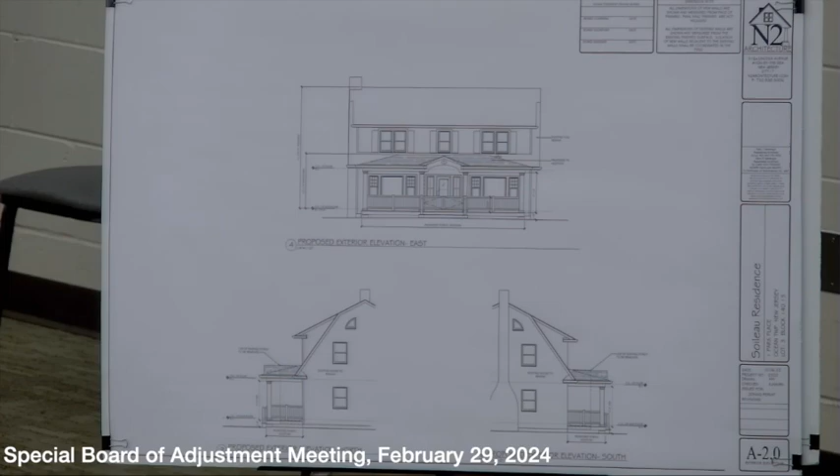This is solely just the porch addition, an open porch addition. We tried our best to integrate it into the house so that it looked like it had always been there. It is a fairly straightforward porch of approximately 7'8" depth and approximately 33'8" wide.

It does not extend all the way to the edges of the building. We knew that we had some issues with the front yard setbacks on the sides, if you will. But also architecturally, it blends in a little better by not going all the way to the edge of the building.

Other than that, it's a fairly standard porch, wood frame structure. It is, as we mentioned, open. It has 36-inch high standard vinyl railing, as seen in the image. It has 4, 10-inch diameter, or square columns, to support it. A hipped roof with asphalt composite shingles, and all the materials will match the standard of the house and neighboring properties.

And that's our application. This is a pretty straightforward application.

And I'll just swear in our professionals, that their testimony they're about to give would be the truth, the whole truth, nothing but the truth, so help them God. I do. Thank you both.

Well, I'll start basically, it's a very difficult site because it's narrow, triangular in shape with 3 frontages, and the variances are just to the sides of the porch, not to the front. They're both within the sides of the house, so this porch doesn't stick out beyond the sides of the house. The master plan actually recommends relaxing the front yard setback standards for covered porches so that properties are more usable. So I don't have any problem at all with this application.

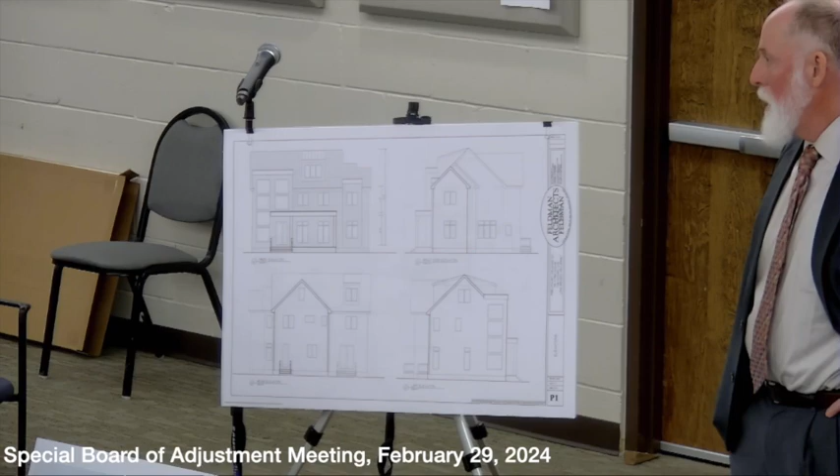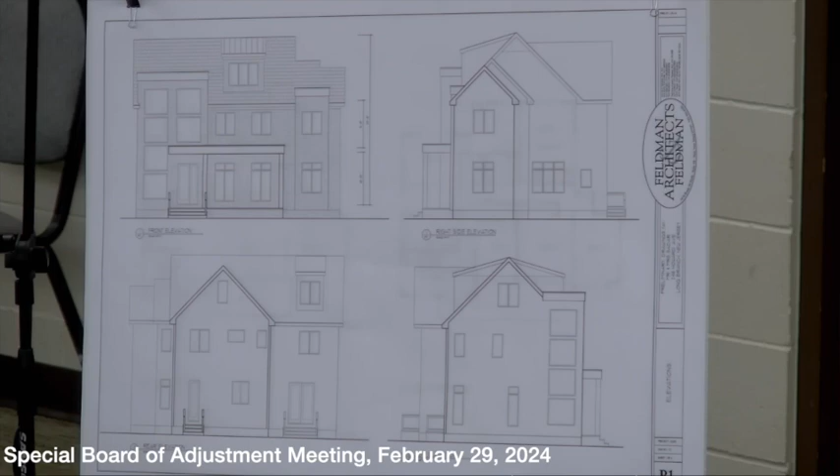So what we're doing is we're expanding an existing two-story home. On the ground floor, we're adding approximately 335 square feet, so it's pretty minimal. Of that, about 175 square feet is living space, and approximately 165 square feet is the exterior porch. The first floor is pretty much going to function the way it functions currently, which is just living space. We enlarged the kitchen area slightly. There's a powder room, a family room, living room, dining area.

And then we created this element, which I'll go into more detail about in a bit, where the staircase would go up to the second floor. The second floor got expanded to 5 bedrooms, 2.5 baths. Currently, I believe there's 3 bedrooms that exist. Their family is growing and they needed additional bedrooms, so they asked if there was a way we could expand that.

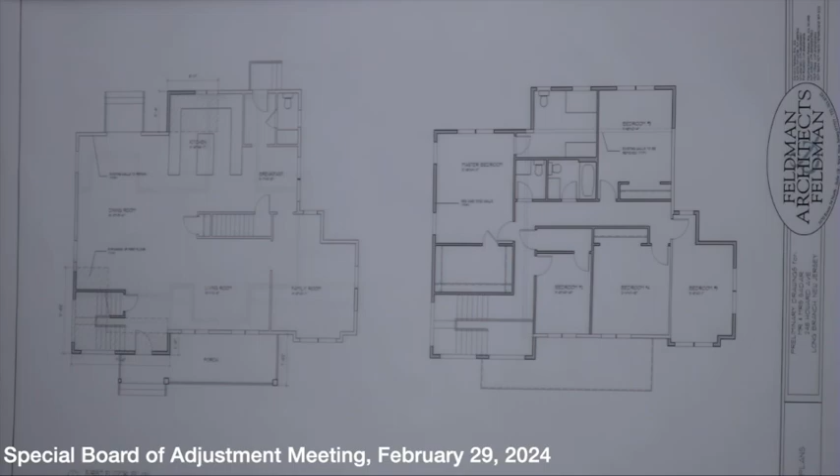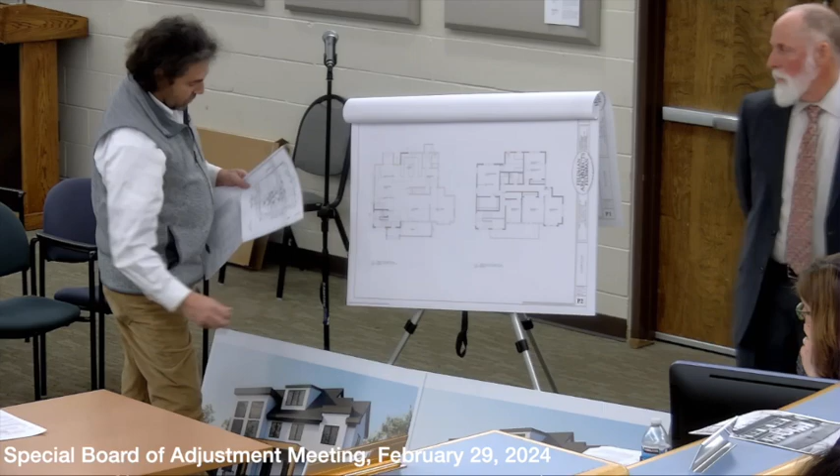As previously mentioned by your board professionals, we are going on the east side, or Wilson Drive. We are going straight up above the existing first floor, which is not increasing the existing nonconformity. The rest of the second floor, other than the addition to the south where the kitchen is getting bumped out, lines up over the existing, except for in the front area here where we're coming out 12 feet towards Howard and approximately 17 feet 4 inches parallel to Howard, which again is going to create the staircase and the entrance coming in.

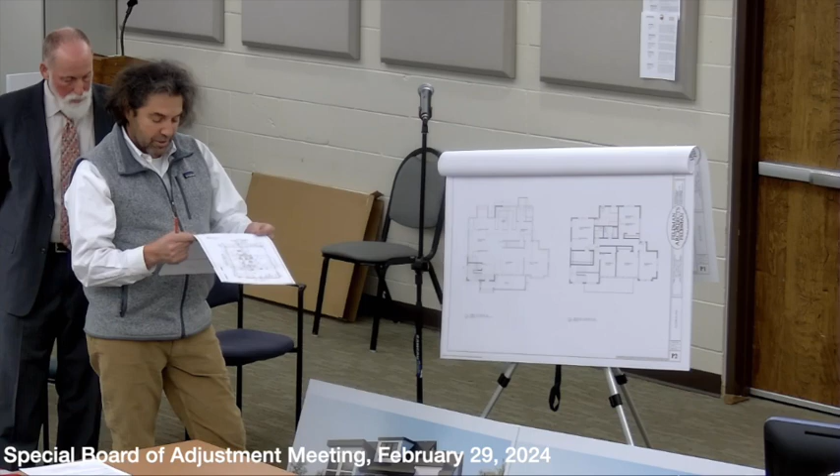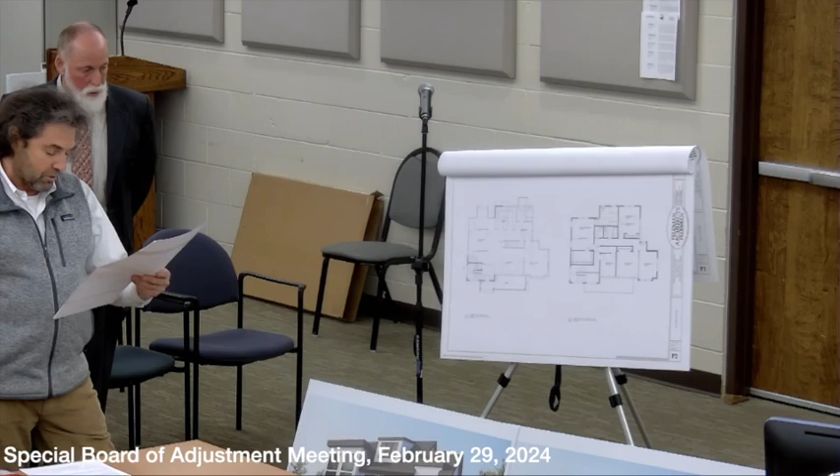Just going through the site itself, the lot area where 10,000 square feet is required, 11,588 is existing. There's no change to that and it conforms. The buildable area, total buildable lot area, is 8,691 square feet, and there's no change to that. The lot width, 90 feet is required, we have 110.6 feet, so that too is conforming, as well as the lot depth where 100 feet is required, and the lot has 100 feet.

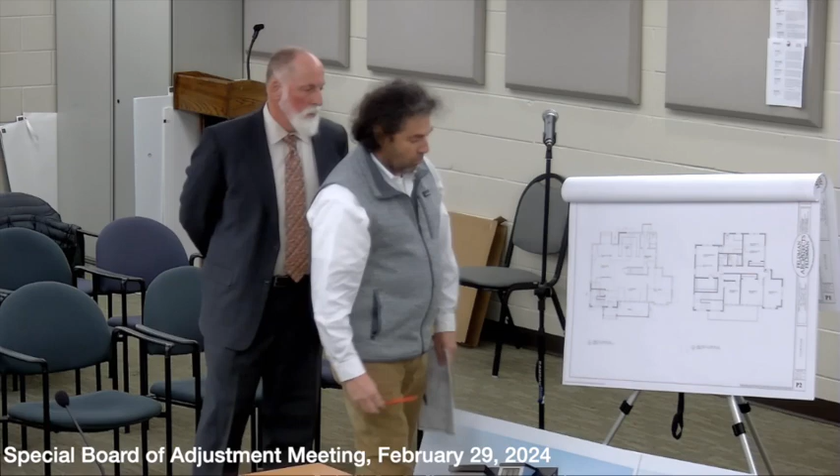The variances that come into play are on Howard Street. Currently, the setback to the front is 29.6 feet to the dwelling. We are now proposing 27 feet to the corner of the stairwell, and we're proposing 22.7 feet to the porch. On Wilson, 13.7 feet is currently existing, and we are maintaining that 13.7 feet.

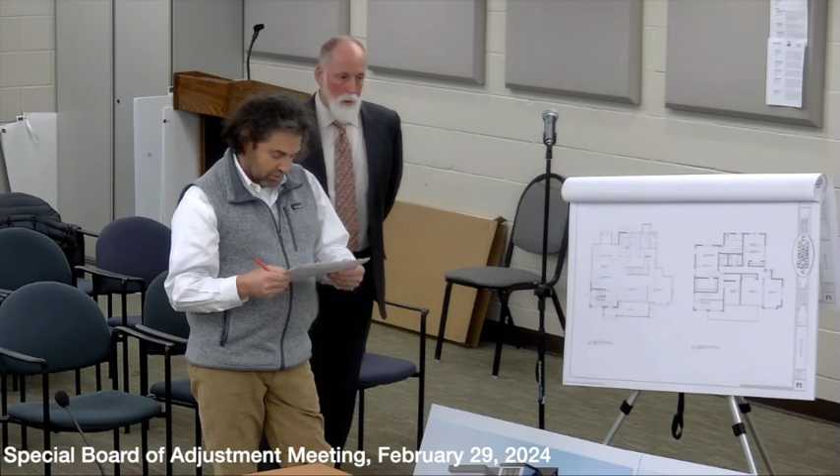In addition, there is a variance required to the porch from Wilson Street. Again, being that it's 2 front yards, 30 feet is required, and we are proposing 27.4 feet. Everything else, the rear yard, the side yard, are all conforming. As previously mentioned, the accessory structures, both the garage and the shed, are into the side yard setbacks, and we don't envision any changes being made to those 2 structures.

Now, Mr. Feldman, if I may, because the team expressed some concern about this - the attic, there's no livable space per se, it's primarily storage. Can you just describe for the record what's being done? So the attic space is really just intended for storage use only. There's no livable space up there. The reason for the dormers is the client likes a lot of light, and again, for an aesthetic exterior perspective, you'll see in the renderings the dormers that were put into play.

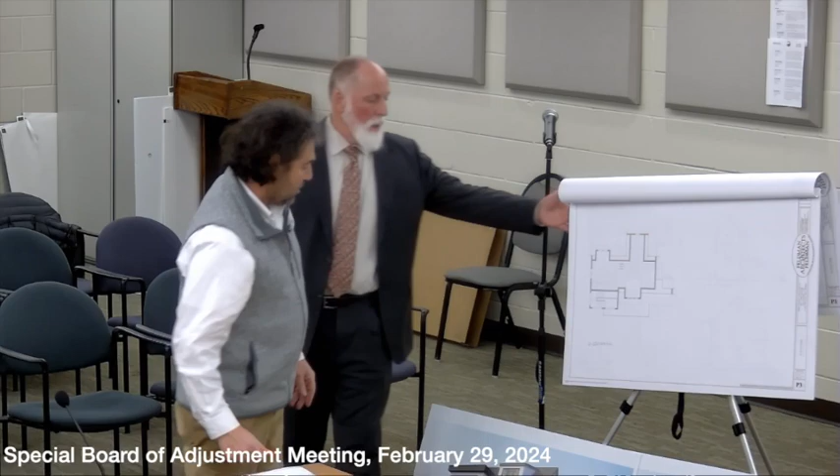So would you accept the condition of approval that the walk-up attic can only be used for storage? We will not only accept that, we'll accept the conditions about the shed and that the garage is to remain exactly as it is now. Okay, a two-car garage, there is to be no pool house application. Whatever's there now is what's to stay.

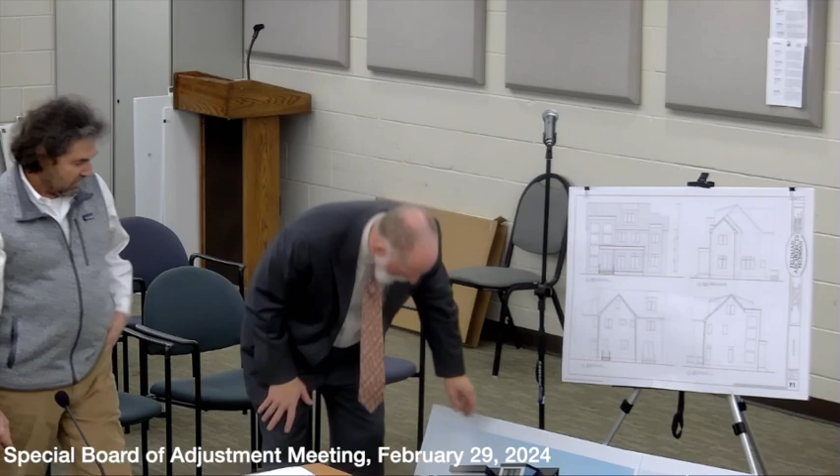And how is the attic accessed? Is it a pull down? No, there'll be a set of regular stairs going up to it. Is there a door at the beginning of the attic? Yes.

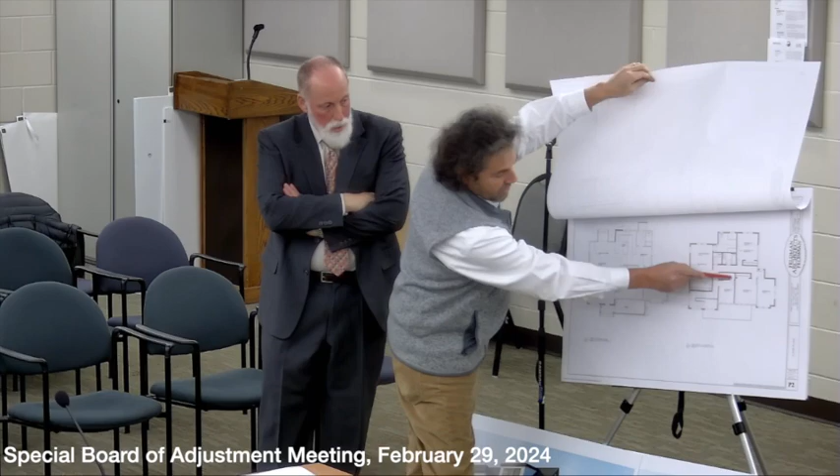So there'll be a door here with stairs going up, and underneath the staircase will be the closet for the bedroom. So the attic doesn't have any closet space, correct, and it's not going to be finished. That'll also be a condition, there will be an unfinished attic.

Okay, and not living space? As far as the elevations, it's kind of ironic.

Why don't you show what's proposed? Or why don't I take this one? Let me just go for this one. I'll hold it, I'll just hold it. Why are they showing us what they don't want? Why don't they show us what's proposed?

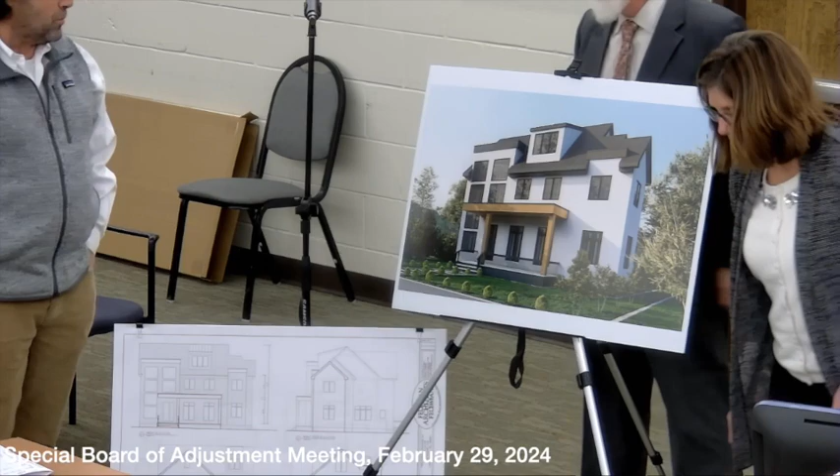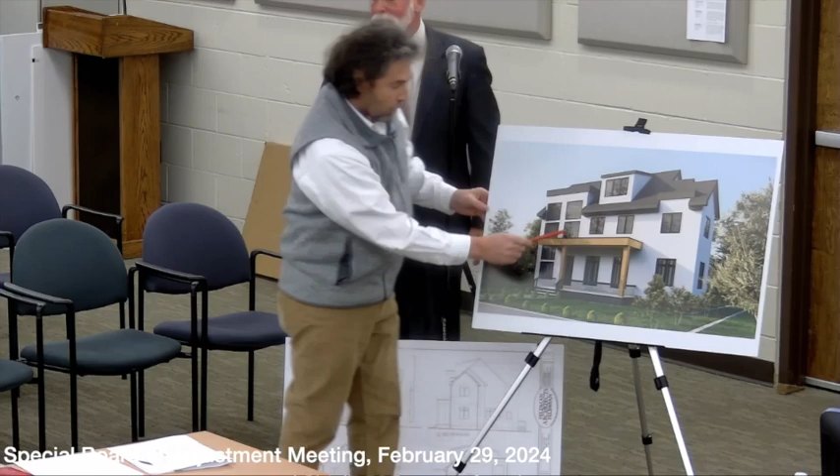So this is what we drew originally, this is A5. This was originally drawn up and presented to the client. As you can see, there's no bump out or window seat, which we are now currently proposing to the right, nor is there a bump out accentuating the staircase and entry on the left. So when we proposed that, we felt it was a really flat facade without much architectural character.

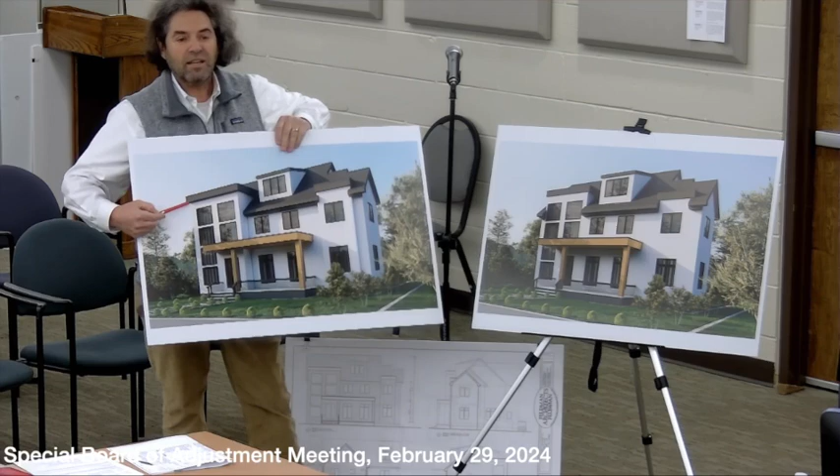So what we then did was go to A6, which now has entered into the equation the window seat and the staircase. And the staircase is really what's coming into question with regards to the 30-foot setback.

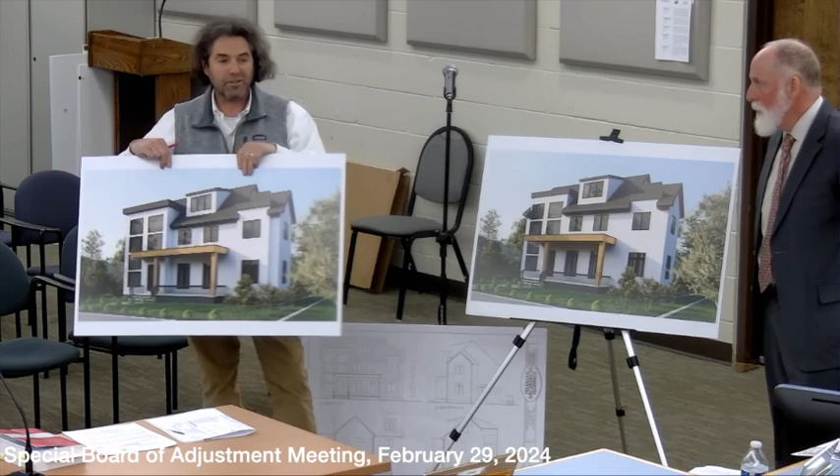And what's even more ironic is when I came walking in tonight, the attorney was out in the hallway talking with the neighbors. And we pulled out both renderings, and their first inclination was, well, this is a box and we don't like boxes. And I said, well, that's why we designed the alternative, which is what we're trying to get approved tonight.

So just to emphasize, the neighbors prefer the bump out because it's less boxy. And while we're talking about the chambers, they were concerned about lighting issues with the front porch because sometimes there's bright lights. They have a beautiful sunroom and don't want to be annoyed at night.

One of the things is, Mr. Feldman, please correct me, there are recessed lights underneath here that will shine down. There's not going to be any, for lack of a proper architectural term, disco lights or anything bright around the top that shines outward. The plan is just for the light to shine down onto the porch surface, which will minimize any overage of lighting so it will not affect neighbors.

We could submit specs on that lighting to your township engineer for his review and approval as well. And as a condition, we will agree that the lights have to shine down and nothing beyond.

Alright, other than that, I think that's the extent of it. Mr. and Mrs. Chris and Sarah Chambers are at 247 Howard. They're avians, they love birds, and they're concerned about birds flying into windows, like poor Flaco or whatever the name of the owl in New York was that was all over the Times.

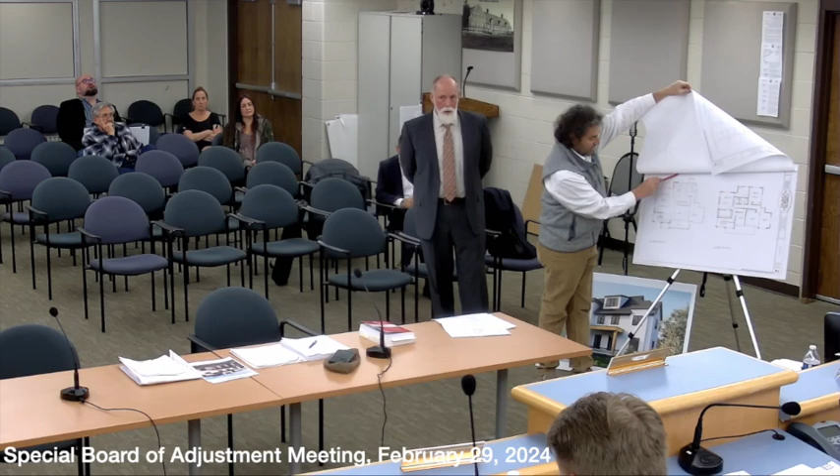Yeah, it's not getting wider, but going straight up certainly intensifies the look and it's a change. Is the pitch changing directions? Yes, currently the existing house has a peak toward Howard, and now we're turning it toward Wilson.

And the side of the house is closer than it ought to be to the property line there, right? Existing east side toward Wilson is currently non-conforming. You're right, yeah. And so going up exacerbates that, okay. But they're bumping it out also. That doesn't help in my mind.

Any other questions? Yeah, go back to the renderings, the pictures. Anyone in particular or both? Either one doesn't really matter.

The question I have is about the stairwell - I assume that's all open on the left side there? Yeah, and that's going to be storage on the top. I really don't see a need for the dormer on the top. If it's going to be truly storage, to me, that doesn't add any aesthetic value to the house, other than somebody converting that to a room later. I understand what you're saying, but there's the aesthetic value I saw in the dormer, as well as bringing some natural light into the attic area, so.

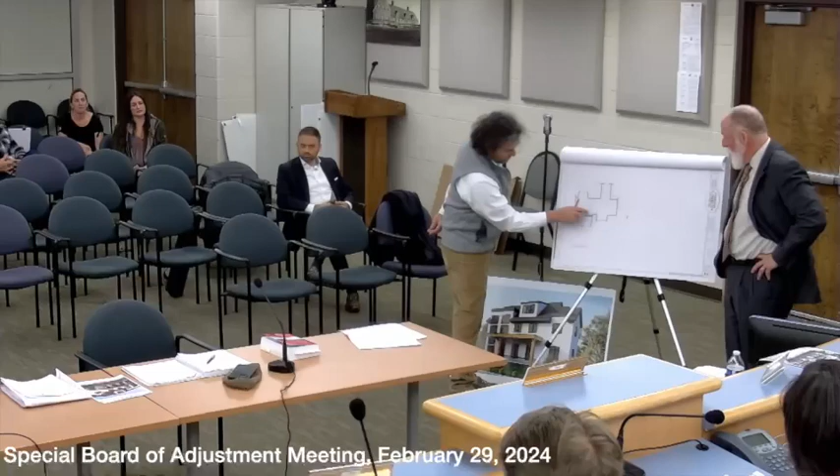So in the center we depicted these dotted lines here. In the center is where the 8-foot mark is, which is roughly about 6.5 feet in width. And then it starts to slope down to 7, 6, 5. So it's 8 feet in the middle. 8 feet in the center. 8 feet for 6 feet.

And then it tapers down, so the ceiling is pitched down with the roof. Yeah, it's a gable roof, so in the center where the gable is, this line indicated on the plan, about 6.5 feet or so, is the 8-foot height in the center. Now, coming across this gable to the back of the home is really maybe about a foot or so. That's only 8 feet, and then it slopes down relatively quickly. So there's not a whole lot of space up there, except down the center and where the dormers are.

How high is the wall where it slopes down? What's the height of the wall at the edge? Here, yeah, we set those at 5 feet. Okay, so a question to the experts.

If the dormers weren't there, there would be no egress. So legally, you could not have a bedroom there, correct? Well, I don't know the building code, so I don't know. That's a building code question. Legally, because of what they're agreeing to, they're not allowed to have a bedroom there. I know, but I'm just saying, if you get the dormer with the windows, it gives you egress.

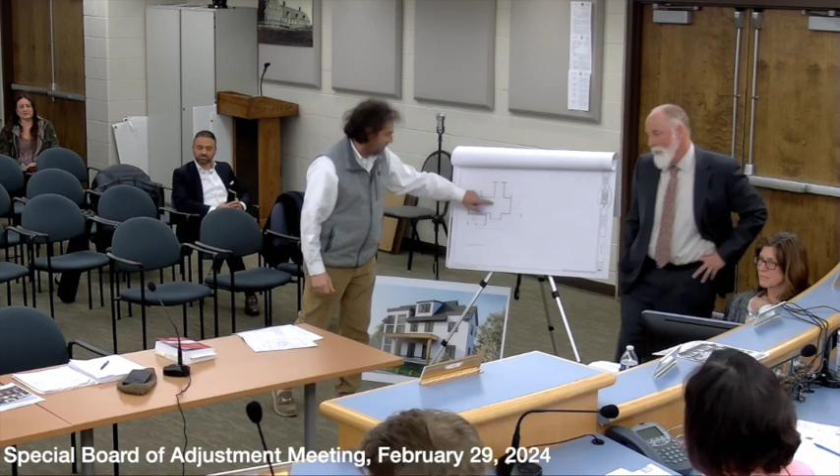What's the square footage of that? But with the window also, wouldn't that provide egress if you calculate it up? Two stories. The square footage at 8 feet, I can't get that out, if I had to guess, I'd say...

It's not gonna be. If I may just address something before there's any more testimony elicited, I spoke to the client. He likes the look with that, but at its widest point, it's 6 feet. I don't see even getting a bed in there. I don't see it ever working as that.

However, he really does like the look of the dormer. And if the dormer is a problem in its current form, and we came back with a smaller, lower dormer, would that address concerns? Or are you folks just dead set against any dormer? Because it's just a design that he likes.

I think, for me personally, the fact that the attic has been set at 8 foot clear, with the angles coming down to 5 feet, has pulled your roof eave up. Essentially, your roof springs from the top of the second floor, whereas if you weren't trying to provide a clear attic, you could spring from the first floor.

No, the roof would still spring from the ceiling of the second floor, maybe halfway through. No, it would, because if we lower that roof down to what you're suggesting, you then create the slopes within the rooms on the second floor. Sure, but with dormers, you could get the clear height you're looking for.

So I think you've made a decision as a designer to raise the entire house to that spring point of the top of the second floor, because you're trying to get a nice height within the attic, and it actually exacerbates that setback, like Mr. Fuller was saying. I think it could have been a lighter touch, with the roof springing from a lower point.

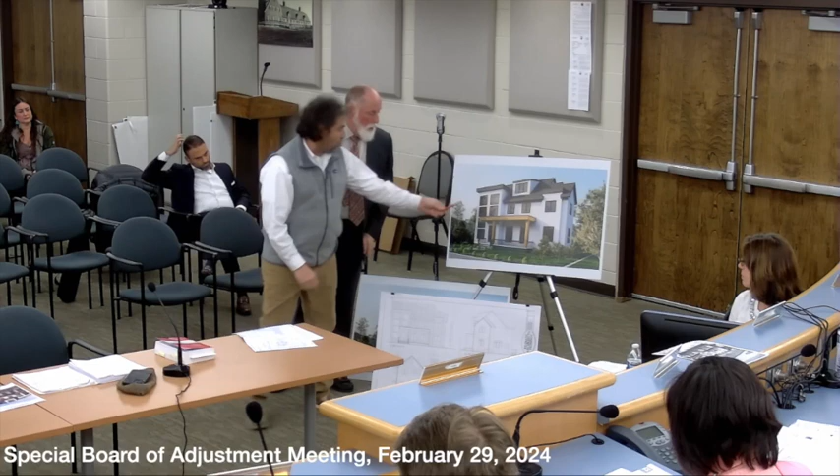It's the whole bump out. Yeah, it's just the bump out. And not the canopy. This is all it is.

But Mr. Farber, the concern over that attic space from Mr. Lineski is whether it could become a bedroom or not. We understand you're agreeing it's not going to become a bedroom, but the reality is if it did become a bedroom, it's going to affect your parking count and everything like that. So that's why it's a concern.

I'm not sure how the whole board feels, but some of the board members are concerned with the way the attic is currently presented, that it basically is inviting someone to renovate it into a bedroom. And I think that's what the concern is, despite what the conditions of approval are.

I could also, if it helps the board—I'm not suggesting either way because it doesn't really resolve the issue—but would you agree to record the resolution as a condition of approval, which clearly states it can't be used as a bedroom for a future homeowner, to be on notice? Absolutely. Okay, and I don't know if that resolves the issue, but at least it's further protection against it being utilized. But I think Mr. Lineski's concern still stands, regardless of whether it's a deed restriction or not.

I just want to clarify something. It's currently proposed as a 5-bedroom house, correct? Yes. So under the RSIS, the maximum number of parking spaces required is 3 for a house that is 5 bedrooms or more. So if there were 10 bedrooms, it would still only require 3 parking spaces.

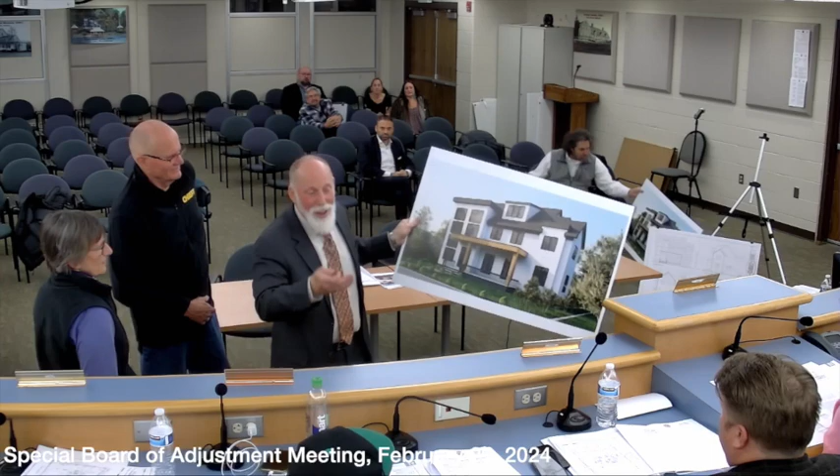And vertical mullions, that would help alleviate the problem. Yeah, it does, and you can put that in. I hear this in Allenhurst all the time, not a big deal, but fine, if you want to put that in, go put it in.

So Mr. Farber, I'm sorry, so specifically what would this be? David, what do you call these elements in a window? Mullions. They'll be mullions. Can someone spell that for me? M-U-L-L-I-O-N-S. All right, so mullions will be installed in the stairway windows, so it's not a straight glass picture window anymore, it's a casement or, yeah.

Okay great, thank you. It'll be that or stickers, but there will be some glass bird control that is put in. All right, what I'm gonna do is, how about we do the mullions or some other form of bird prevention, subject to the review of Bennett, so I'll put it on you, and I'm sure CME will figure it out. Is everyone okay with that?

Put it on Jason, he'll verify. Bennett can talk to Jason and see if it works, if he needs someone. I think that's fair, send you a set of drawings I'm looking at right now.

Any other testimony, Mr. Farber? If the board would like, but it is now been almost 40 minutes. My client did testify what the block looks like, but based upon what the homeowners across the street said, I don't believe that's necessary. Okay.

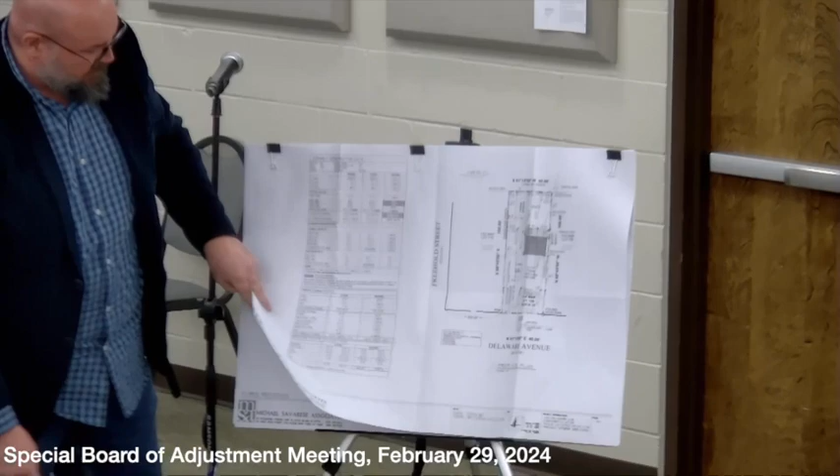So as Mrs. Stark was saying, the home is existing, non-conforming. It is a rather small home, one of the original bungalows from this section that's still remaining. What we're basically taking on, in an effort to keep the costs as economical as possible, is going straight out with the addition, tying into the existing foundation.

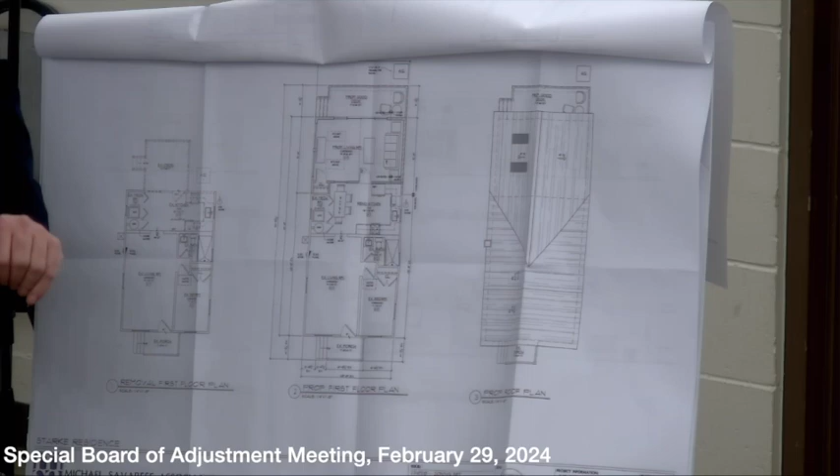Also, by going straight out with the kitchen area, it allows us to enlarge the kitchen a little bit, again with possible mobility issues coming into play later in life—having a little bit more space to turn, and God forbid there's a walker or some assistance needed later, it gives a little more room in the kitchen for a person of advanced age to work. It also allows Ms. Stark to work in the kitchen with her mother, spending that quality time together.

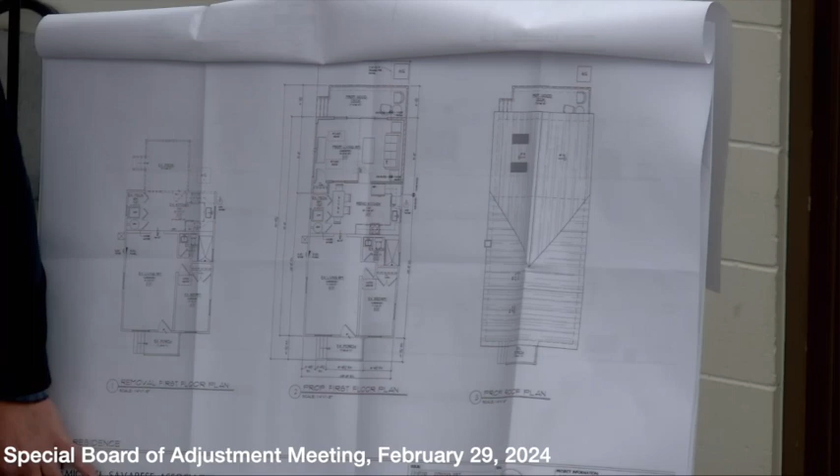We're also adding a 6'2.5" wood deck out back, just to utilize the backyard a little bit better without requiring stairs or steps to get down, so her mother can go outside without the risk of falling—she likes to read on the deck. In doing so, we tried to keep the character of the existing home. As you can see from the front elevation, it is a very modest home.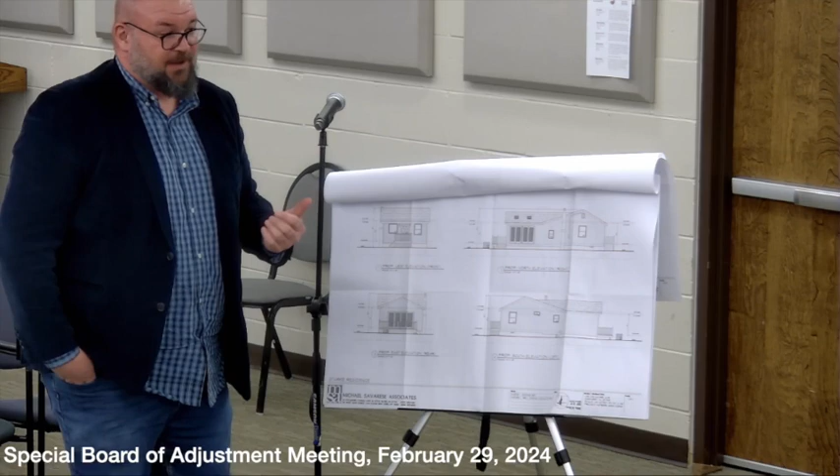On the one side, because of our closeness to the property line, we're going to have some fire rating that we have to adhere to. That's why there's limited openings, no openings in the proposed addition on that side, so we can achieve that required fire rating as to not become a danger to the neighbors.

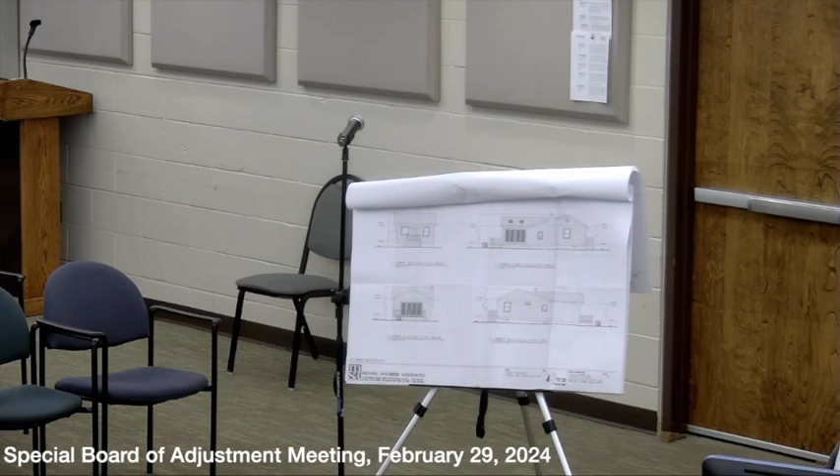Is the 1.7 feet adequate for maintenance of the house? I believe so. It's really only that one corner that becomes 1.7, and we already have 2.7. It's an additional foot, that's the only real concern I had.

You can still get a rake in to get the leaves out from collecting there. Other than that, we're proposing low maintenance exterior, so painting is not going to be an issue, we're going to use vinyl siding. Power washing, we can spray from a distance, so we can get in there. I believe maintenance is definitely achievable.

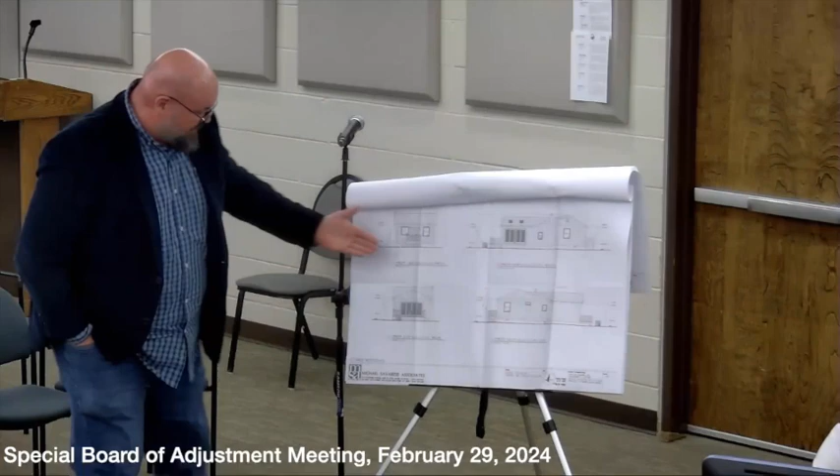And again, just the elevation facing the rear, providing some large windows or large doors that will open out to the back deck, just to enjoy nature a little bit. And that is really the whole sum of our application.

Yeah, that's the old one. So, okay. Any questions?

One thing for the board's consideration, which I didn't cover when summarizing my report: the existing building is 882 square feet. The ordinance requires a one-story building in this zone to be a minimum of 1,300 square feet. They're expanding it, they're not getting to the 1,300, but they're getting closer, so they're making that non-conforming condition quite a bit better.

Can you repeat what's required? 1,300 for a one-story. And they have what, 882 now, and they're going to 1,119 proposed. Great, thank you.

The addition's gonna match the rest of the house? Yes, it's gonna match in finish. The roof is gonna match it. Everything's gonna blend in as seamlessly as possible.

Any other questions? The neighbors, as you're looking to the house to the right, how does their house match up with your existing house? You mean how close is it? Well, no, like how far back. Here's my question: the air conditioning unit you currently have is right behind the house. So you're going to move back the house, and the air conditioning unit will also go with it. So is that moving actually further away from your neighbor's house technically at that point?